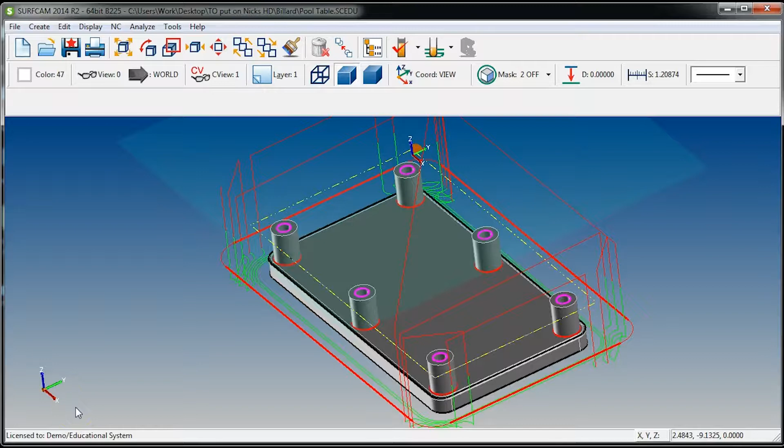On to cutting out all of this material on the inside. Now, looking at this part, that's going to be the most time consuming. So if you had a production run, I might not do it the way that I'm talking. If anything, I may think about TRUEMill, which is an option in Surfcam.

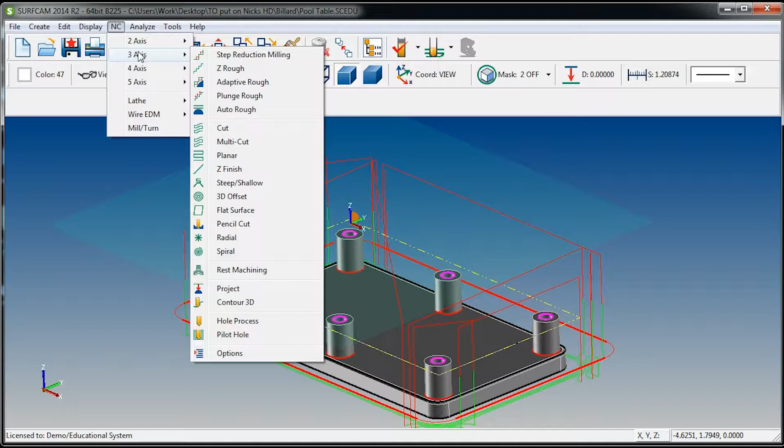I don't think it comes with the demo mode. Maybe it does, let's see. No, if your company offers TRUEMill, we will have a lesson on that. But during this tutorial, I will not provide that because most of the licenses that you will be buying from Surfcam will not come with TRUEMill. I believe that's a separate thing that you have to buy.

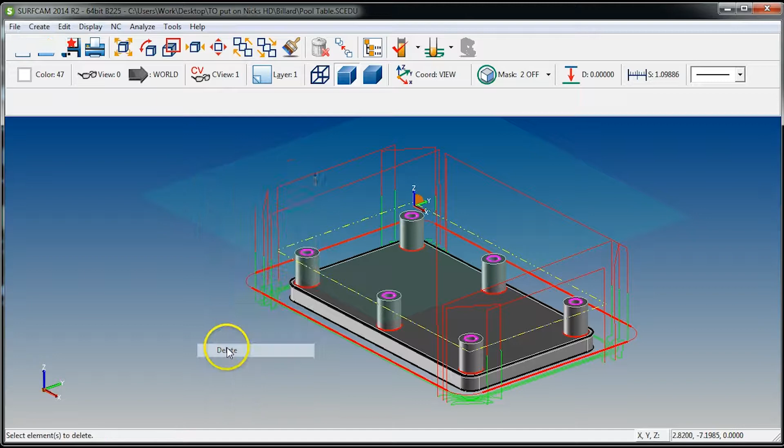So for now, we'll just use the pocketing feature. Let's go ahead and delete this toolpath. If you right click and go to delete, and you delete this, it does not delete it out of the operation manager. It's still in there.

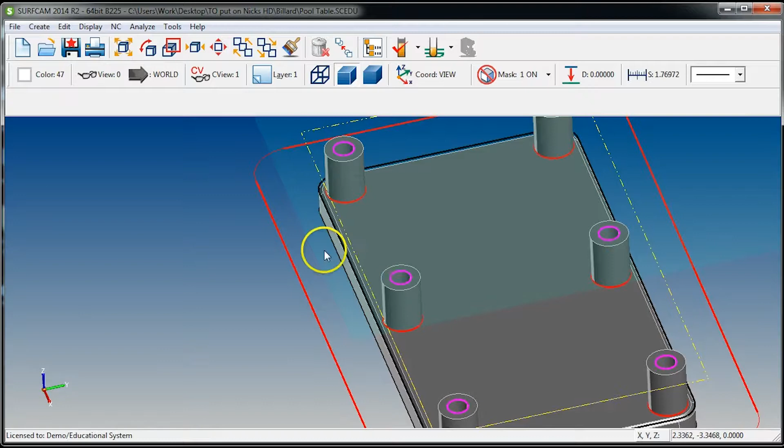We will need to turn our masking on for red lines, and that will be all of these diameters and this outer red line. Now the reason I offset this line so dramatically beyond the part is because it needs room for the end mill to go around. So if the end mill is a 1/2 inch end mill, it will need to be at least a 1/2 inch plus away from your part. So there will be a little bit of cutting air, but again, we're just making one part and we're trying to get this done. So I want to show you the pocketing feature next.

Our masking is on, so let's go to NC 2-axis pocket. Everything visible - our visible is not here, so we have to go to auto, then everything visible. Done. We will be using the exact same tool, so 1/2 inch end mill, tool 3. And notice it kept all of my same settings. That is one cool feature about Surfcam, is it will keep your same settings.

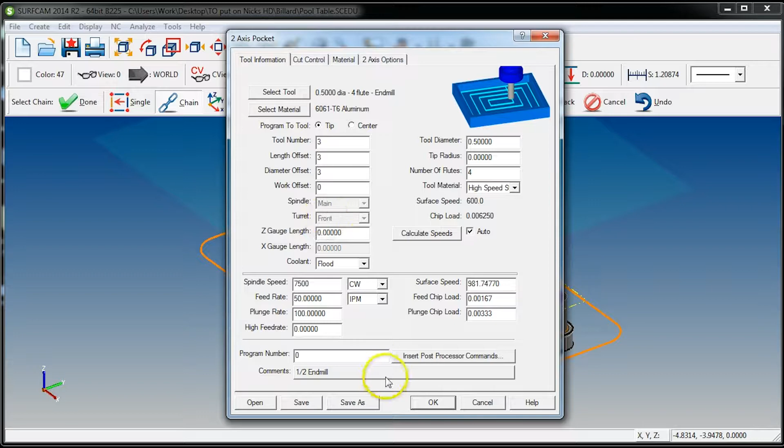So on the inside of the pocket, because we will be plunging into straight material, we won't just plunge in there, we will helical first. We want to change a few of the feeds and speeds. We can bump this up on the machine as we run it, but for now let's just feed 30. And plunge rate, the plunge rate is important because that's what we will be helicaling at. So the helical feed rate will also be different than the actual feed rate because it will be the plunge rate. So let's helical at 15.

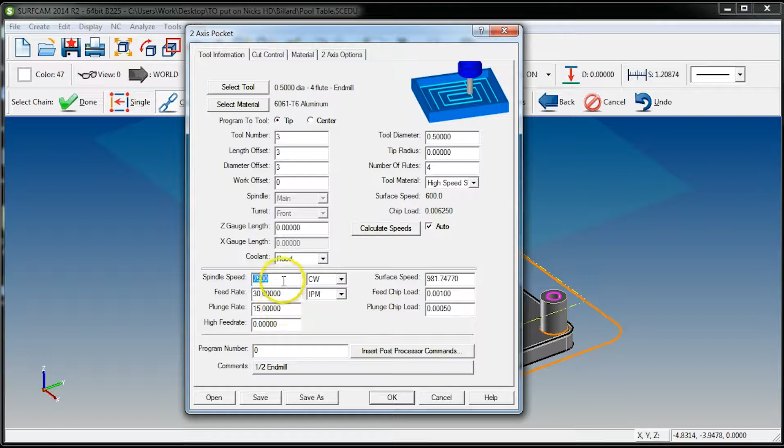1/2 inch end mill. Alright, all that looks good. Again, you want to plug something in here that you know is going to work. And while you're listening to that end mill on the machine, you can bump it up or slow it down.

So let's go to cut control. We're going to be climb cutting. The pocket cutout mode - you have spiral, zigzag, and zig. We're just going to leave it at spiral. I've never been in the situation where I had to use zigzag or zig. I've always left it at spiral.

Alright, you do not have to worry about any of these settings except for top. But I'm going to go ahead and leave it at top, and then I want to show you the difference between top and bottom. Alright, taper angle, we'll use that one later, but not right now.

So the Z depth is one thing we forgot to check, but for now, let's go ahead and plug in a number. We'll say 750. And we're going to take this full depth, 750. Actually, let's take that in 2 steps.

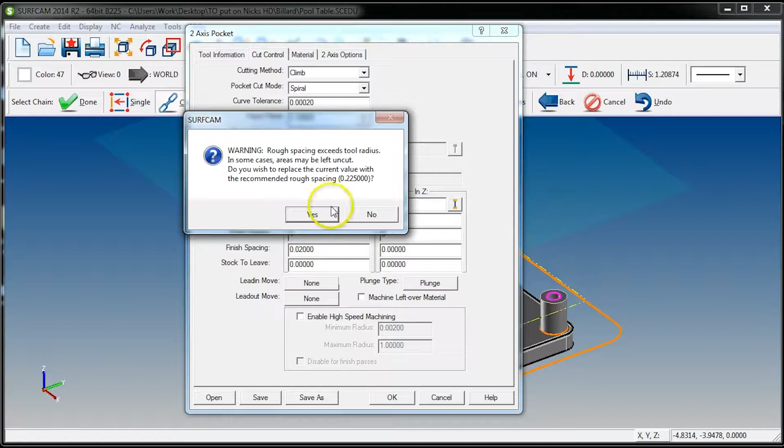Alright, rough spacing. Now you'll notice that it does not allow you to choose the amount to remove in X and Y, and that is because it automatically does the math. So if my rough spacing was 0.3, it throws up an alarm basically telling me that there will be spots on the bottom surface that will be uncut if I did 300 thou spacings. So it's saying the minimum value is 225, so I hit yes.

Alright, we do not need any finish passes because we are roughing. Finish spacing, we will go into more finish passes whenever we program the finishing cycles.

Stock to leave, we do want to leave stock in X, otherwise it'll be finishing those diameters, those studs sticking up, so we want to leave 8 thou. And we definitely want to leave stock in Z, so we're going to leave 15 thou. I like to leave a little bit more stock in Z in case you had an end mill break or something like that, that way it wouldn't gouge your material. If you're really scared, you might want to leave 20, but 15 should be just fine.

Lead in move, we will put an arc on. Same lead out. Change it to feed. We'll go to constant, and we'll say 50 thou.

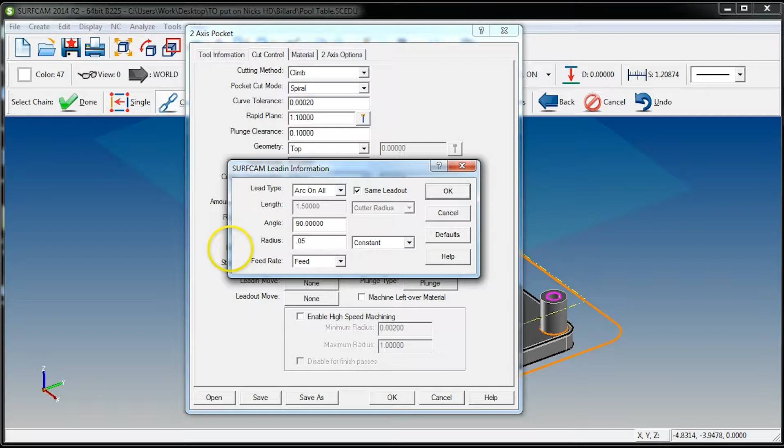And that is everything that we need to change for pocketing this out. Now let's see how it looks.

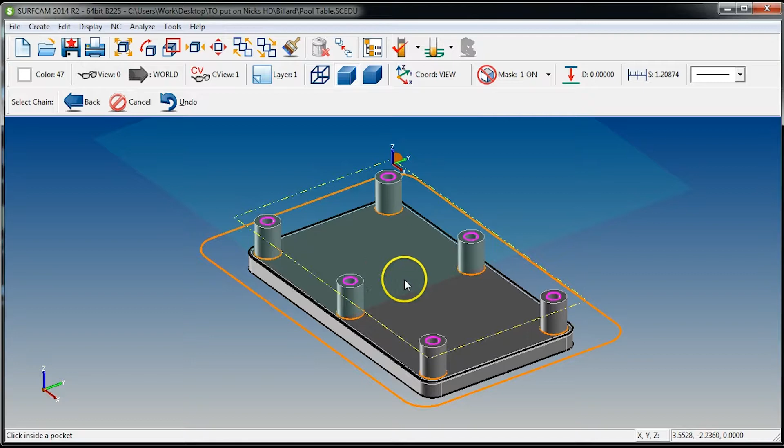Now there will actually be a few issues because we don't know the depth and we have it set on top, so I'll explain that. I'm going to hit OK. Now it's saying select inside of the pocket. Click in the middle and we'll hit accept.

Now you'll notice it's way down here, and that's because top, whenever it's selected, goes from the very top of the geometry down.

So from the toolpath to the geometry is 750 thou. Let's go ahead and measure the distance that we actually have to cut.

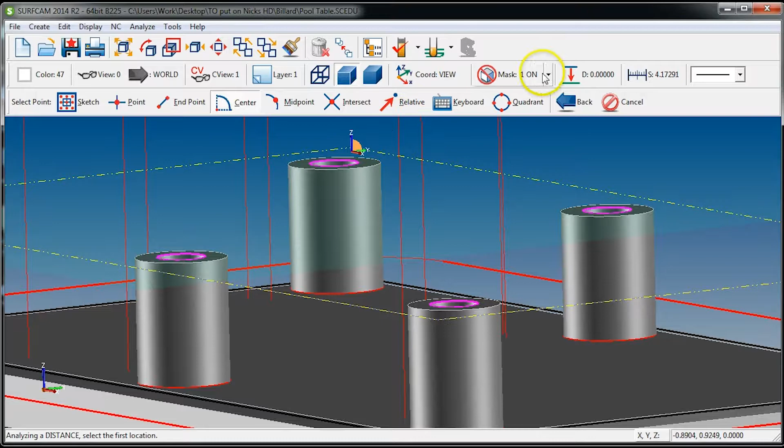Alright, the masking is on, so we need to turn that off. The center of that to the center of that. So we got the great number of 666, so should be easy to remember.

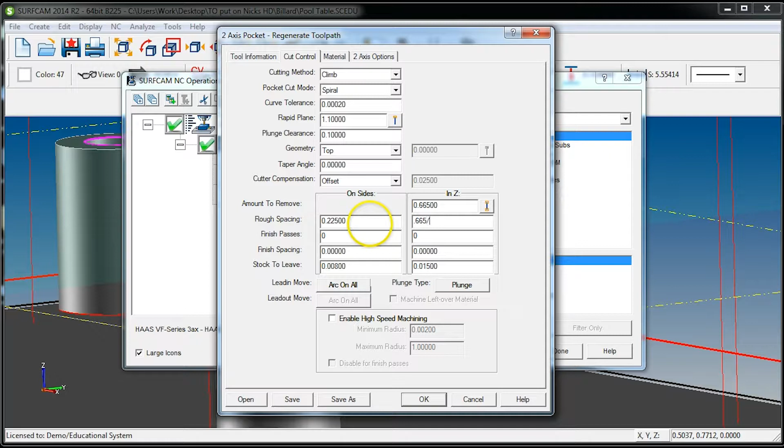So I hit escape, go back to the operation manager, and we will change that to 0.665 because I am superstitious and I do not want to run a machine with 666. So we're going to change that to 665, and all I did was go 0.665 divided by 2, hit tab.

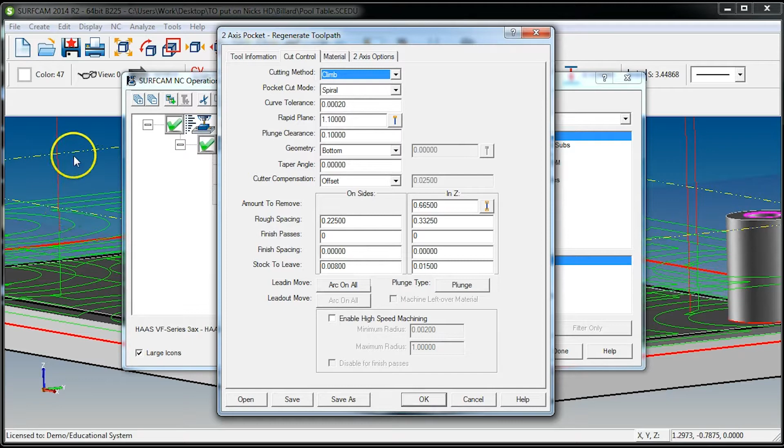Everything looks good. So all we have to do now is go to bottom, and what that will do is it will go to the geometry and stop. So everything that we programmed in that Z column is from the geometry up whenever you hit bottom, but when you say top, it will take everything from that geometry and go down.

It's a little tricky at first, but once you understand how Surfcam thinks, it's very easy. The other two we will go over later. That's most of the time all you're going to be using is top and bottom, not bottom Z and top Z. There has been occasions where I've had to use bottom Z, but you will not be using those on a day-to-day basis.

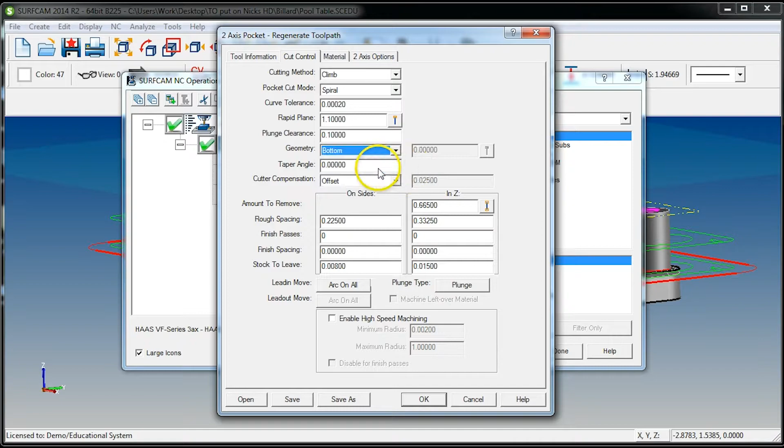Alright, so that is our roughing cycle. Now there will be some funky movements here and there. You'll notice that it hits these sharp corners, so there is a way to avoid that. So let's go back into our options.

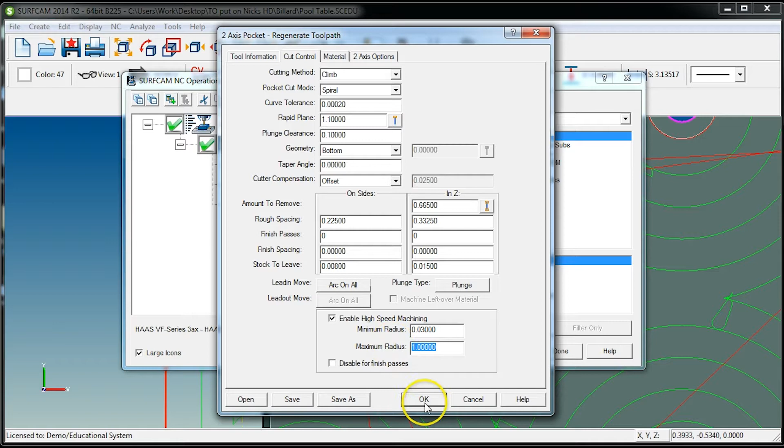And we're going to enable high-speed machining and give it a minimum radius of, let's say, 30 thou, and a maximum radius of, we'll leave it at 1 inch. Hit OK, and notice it turns those sharp corners into a radial move.

Now the very last thing that I forgot to do, which we'll go into right now, is helicaling into your material. As of right now, it's just plunging straight down into 300 thou. So we need to go back into our options.

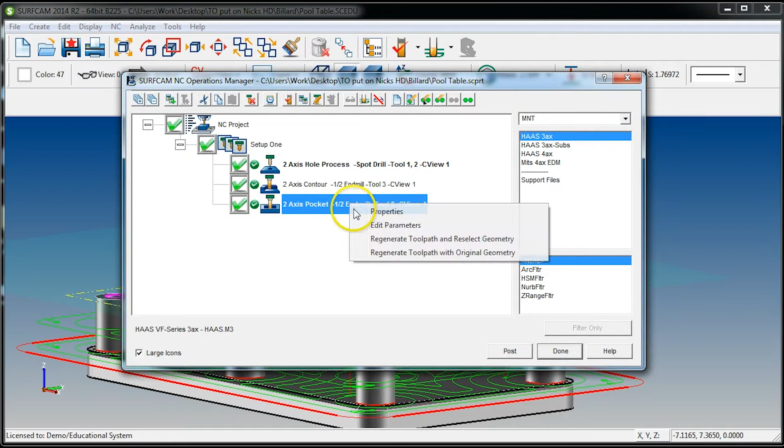In the plunge type, you can peck, but I wouldn't suggest doing that in steel. Let's go to helical, it's way better on the end mill. I only changed two numbers on this entire thing just to kind of make it easy for you, and that is radius and pitch.

Whatever I make my radius, I'll divide that by 2 for the pitch. And it's as simple as that.

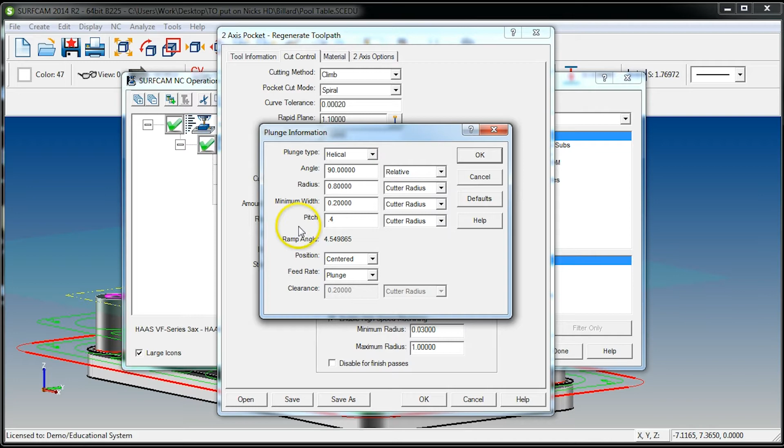How I adjust my helical is I'll hit OK and visually look at where it's helicaling. So it's doing it right here.

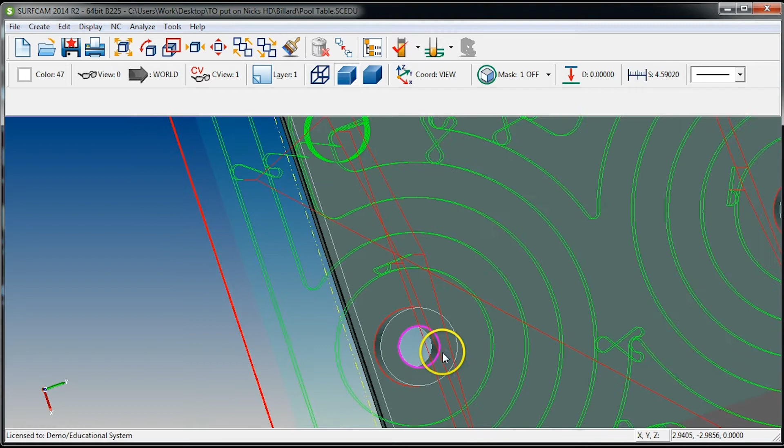This rule mainly applies whenever you're helicaling into a hole, to make sure that it's not too small, because you always want to helical as close as you can to the diameter. That way it's a light cut at the very bottom, which we will go into later.

For now, that helical looks just fine. So it's going to start helicaling down about 300 thou, then it will start pocketing all this material out.

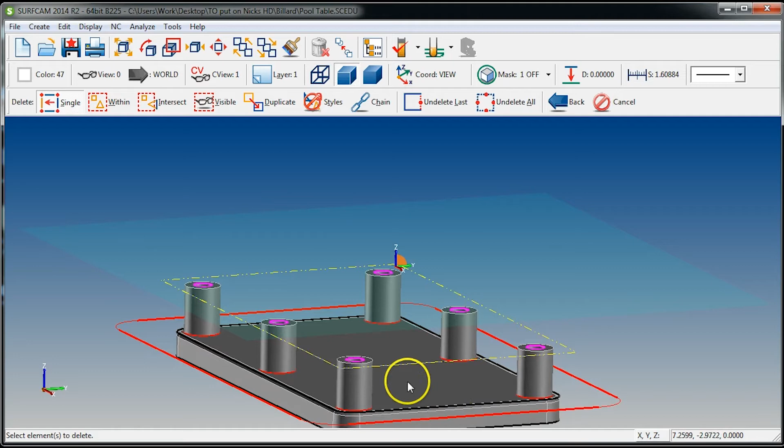Now we can move on to finishing the bottom of the pocket, the profile, and also adding a drill mill on all these edges so we have a nice little chamfer, and then we will go into 3D'ing this chamfer.